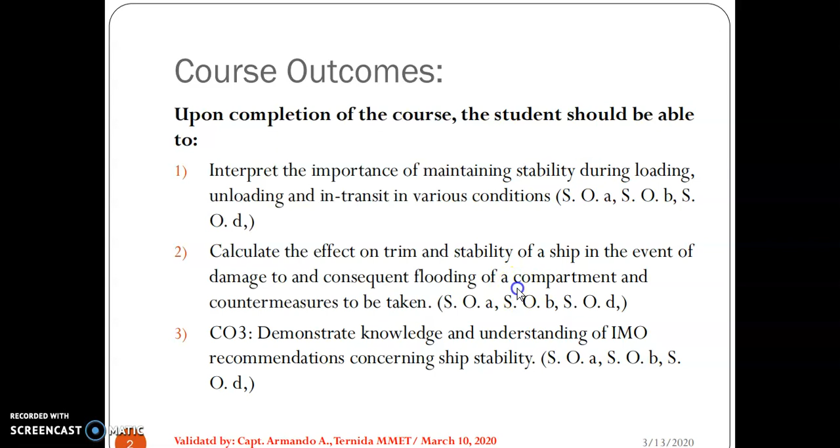Okay, so our topic is materials and strengths of ships. So class, the role of the classification society is the assurance that any practical vessel is structurally fit to undertake a proposed voyage. So each ship is being certified by the classification society, no?

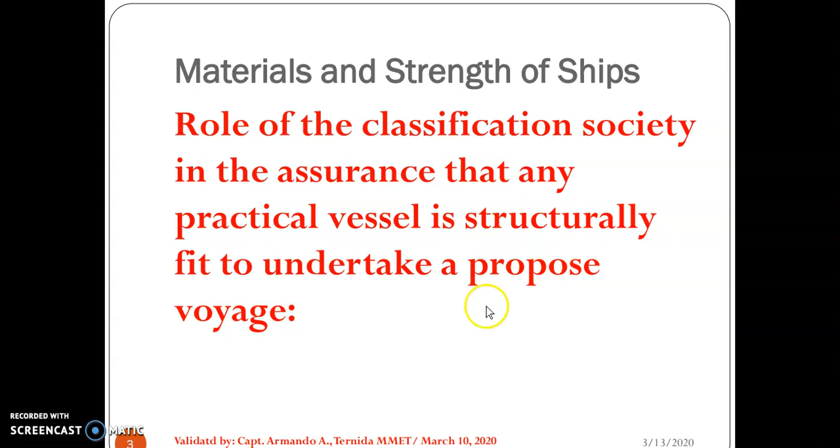Okay, so a system of classification has been formulated over a period of some 200 years. Why? Because the cargo shipper and the underwriter, to insure a maritime risk, require some assurance that any particular vessel is structurally fit to undertake the proposed voyage. Another reason is to enable the shipper and underwriter to distinguish the good risk from the bad. Okay, so these are the reasons why classification was created.

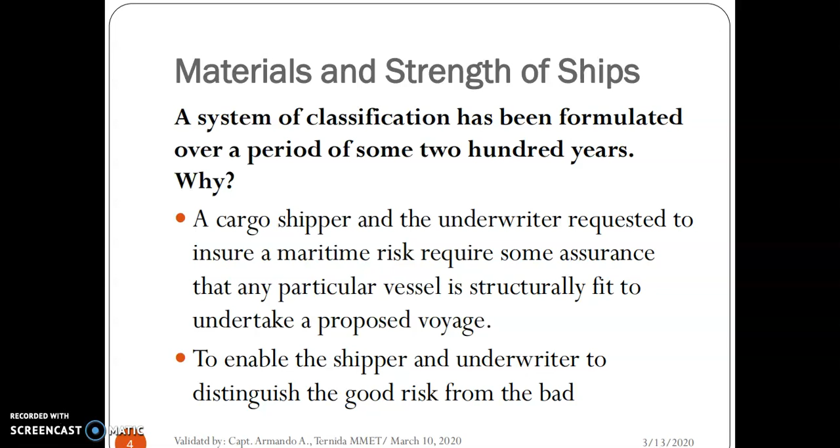Another reason is that reliable organizations have been created for the initial and continuing inspection of ships, so that classification may be assessed and maintained. So the organization has been created to continuously assess if the ship or vessel is still maintained and still seaworthy. Okay, so we are talking about the safety of a certain vessel through the creation of this organization.

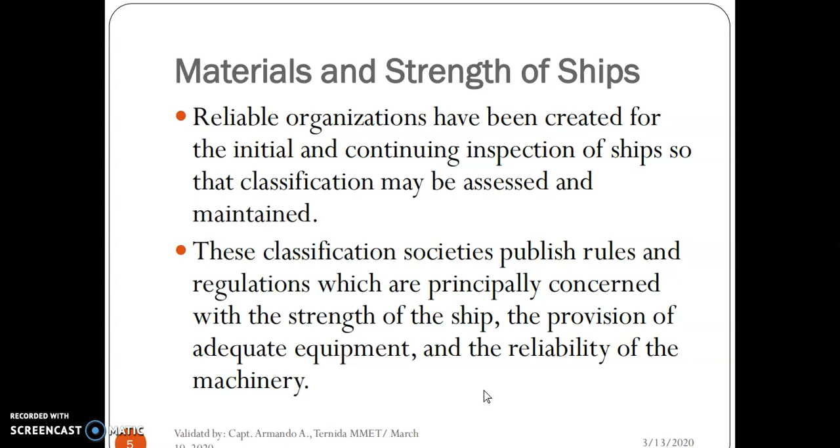Another point is that classification societies publish rules and regulations which are principally concerned with the strength of the ship, the provision of adequate equipment, and the reliability of the machinery. That's why the classification was also published, or created, to monitor all this equipment and classification of a ship.

Okay, so there are principal maritime nations with the following classification societies. First, we have Great Britain's Lloyd's Register of Shipping. So this is UK, no? And another is France, Bureau Veritas. Okay, so these are societies that are very famous with regards to checking or classifying vessels. Another is the German Lloyd, or Germanischer Lloyd. This is also very famous, this German Lloyd or GL, what we call GL.

No? We can see this GL mark in the middle of the vessel, this Plimsoll mark, you can see it was marked by GL. You can see that on certain vessels. Okay, Norway, Italy, United States also have the ABS, or American Bureau of Shipping, as well as the Russian Register of Shipping. And for us in Asia, we also have the Nippon Kaiji Kyokai, or in short, NK.

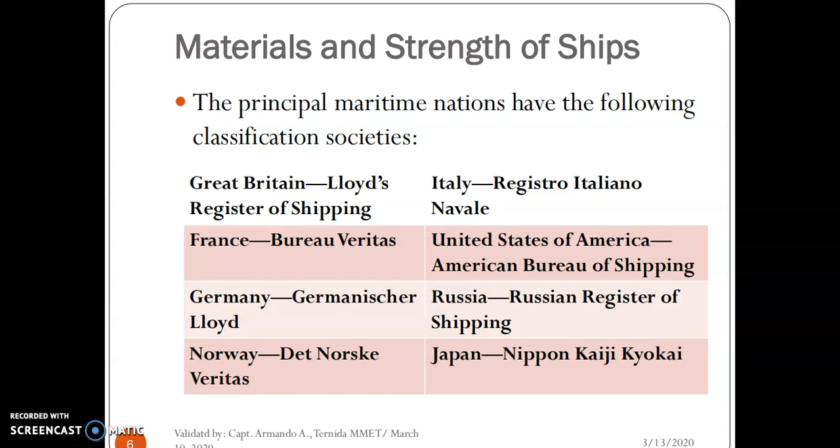Okay, in recent years, the principal classification societies have developed software packages for use by shipyards, which incorporate dynamic-based criteria for the scantlings, structural arrangement, and details of a ship's structure. So this classification society has already developed software in order to carry out their criteria, even dynamic criteria, structural arrangement, and details of ship structure. So it's very accurate what they calculate.

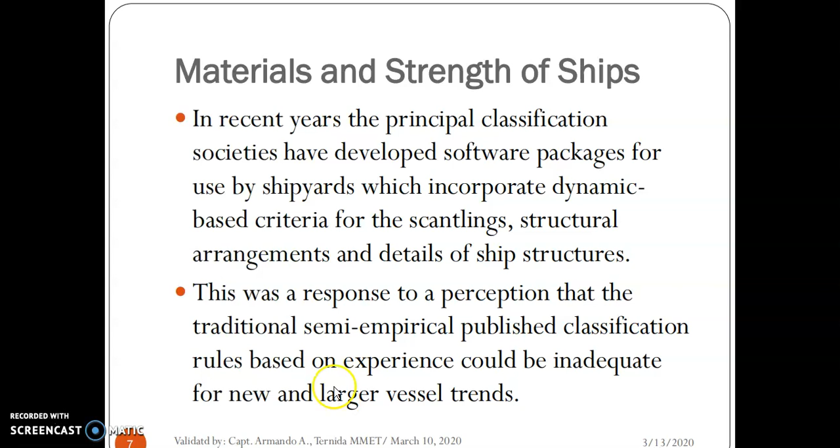This was a response to a perception that the traditional semi-empirical published classification rules, based on experience, could be inadequate for new and larger vessel trends. So for any size of vessel, they can assess if the vessel has been approved by the classification society. So that's the time he can sail, no? He is certified as seaworthy.

Okay, the computer programs made available to shipyards incorporate a realistic representation of the dynamic loads likely to be experienced by the ship, and are used to determine the scantlings and investigate the structural responses of critical areas of the ship's structure.

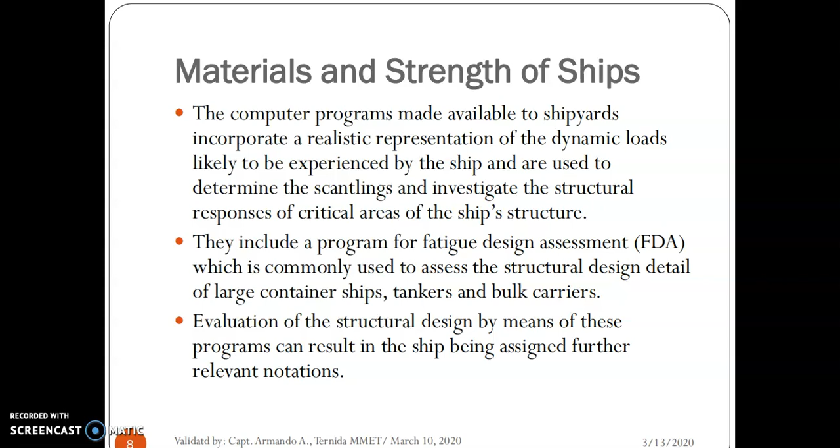Another aspect is they include a program for fatigue design assessment, which is commonly used to assess the structural design detail of larger container ships, tankers, and bulk carriers. This FDA program measures the fatigue encountered by such vessels. Evaluation of the structure designed by means of these programs can result in the ship being assigned further relevant notations.

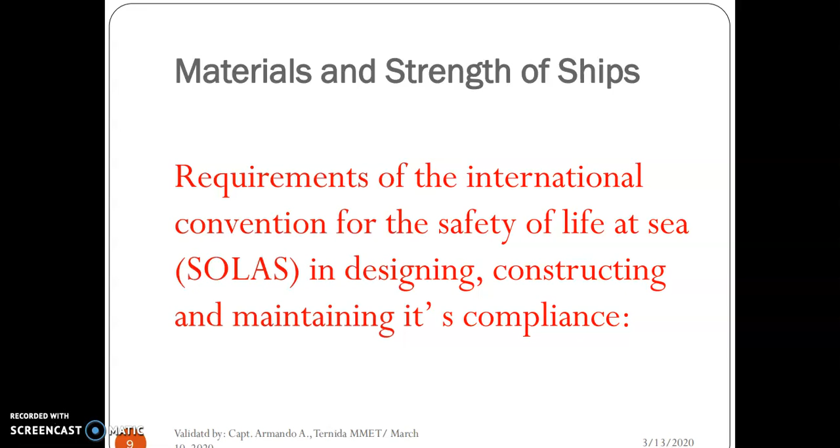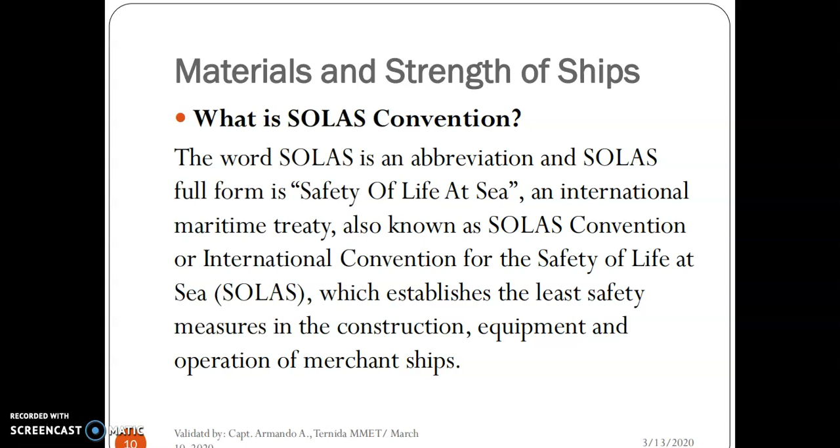Requirements of the International Convention for the Safety of Life at Sea, or SOLAS, govern designing, construction, and maintaining its compliance. Class, what is the SOLAS Convention? The word SOLAS is an abbreviation of Safety of Life at Sea. It is an international maritime treaty, also known as the International Convention for the Safety of Life at Sea, which established least safety measures in the construction, equipment, and operation of merchant ships.

SOLAS Chapter 2-1 covers construction, subdivision, and stability, machinery and electrical installation. This chapter deals with the watertight integrity of the ship, including passenger vessels, and comprises 7 parts explaining the requirements for structural machinery, electrical stability, and other criteria for a safe ship.

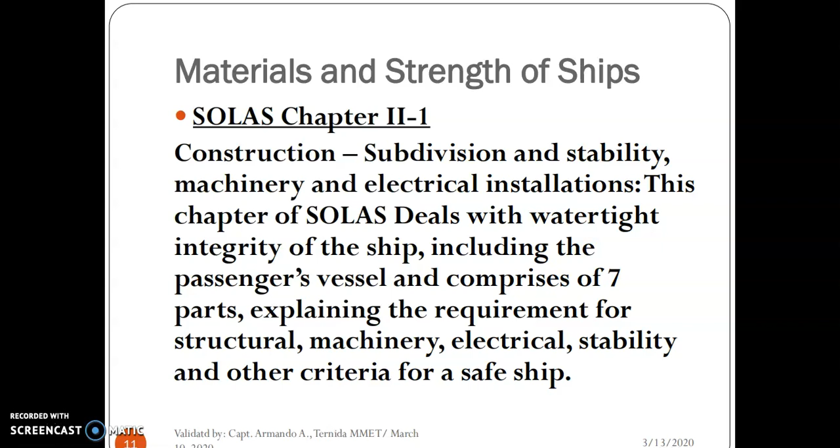Part A contains 3 regulations which explain the application of this chapter on ships as per their keel laying. The regulations also explain the definition of different terminology used in the chapter.

Part A1 comprises regulations explaining the requirements for the structure of a ship, including protective coating, towing arrangement, equipment fittings, construction, and drawings, etc.

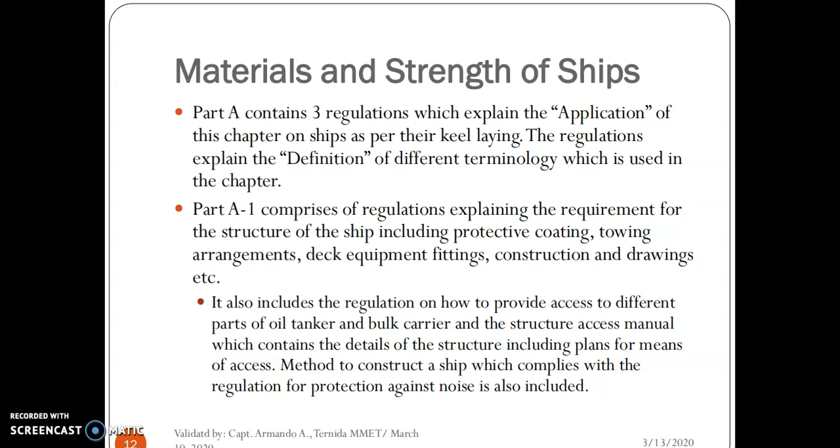It also includes regulations on how to provide access to different parts of the oil tanker and bulk carrier, and the structure access manual which contains details of the structure, including plans for means of access and methods to construct a ship which complies with the regulation. Protection against noise is also included, so even noise protection is included in assessing or classifying the vessel.

Part B regulations explain the stability and watertight integrity requirements. So in Part A, most of it is structural, and here in Part B it's the stability and the watertight integrity.

Under Part B1, regulations 5 to 8 define the necessary conditions for maintaining the intact stability of the cargo ship and the passenger ship. It also includes requirements on the information which needs to be supplied to the master on the stability of the vessel, explaining how to calculate the stability factors in different conditions. So Part B is clearly more about stability.

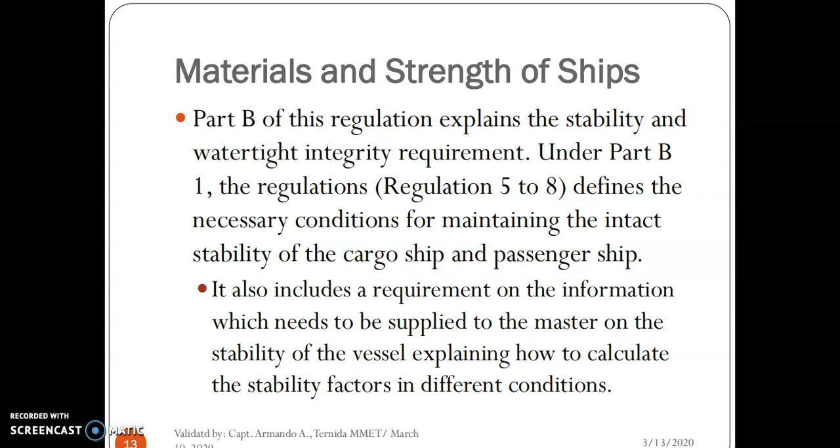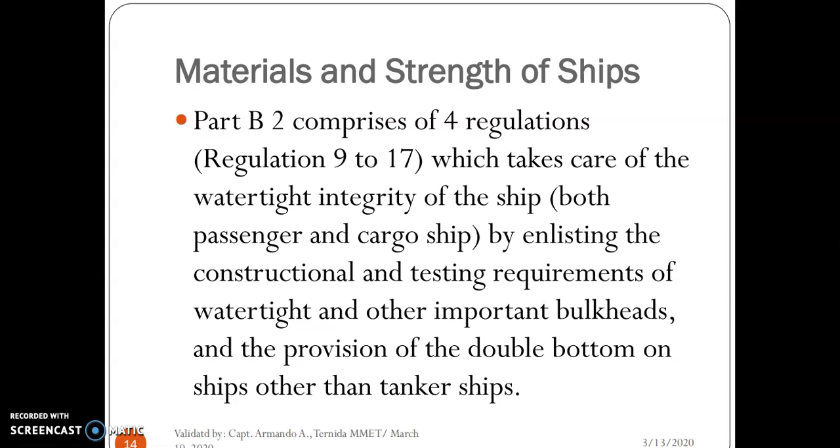Part B2 comprises regulations 9 to 17, which take care of the watertight integrity of the ship, both passenger and cargo ship, by enlisting the constructional and testing requirements of watertight and other important bulkheads, and the provision of double bottom on ships other than tanker ships.

Part B3 explains the requirement for the subdivision and load line assignment for passenger ships. So B3 explains the requirement of subdivision of the load line — tropical, summer, freshwater, and so on.

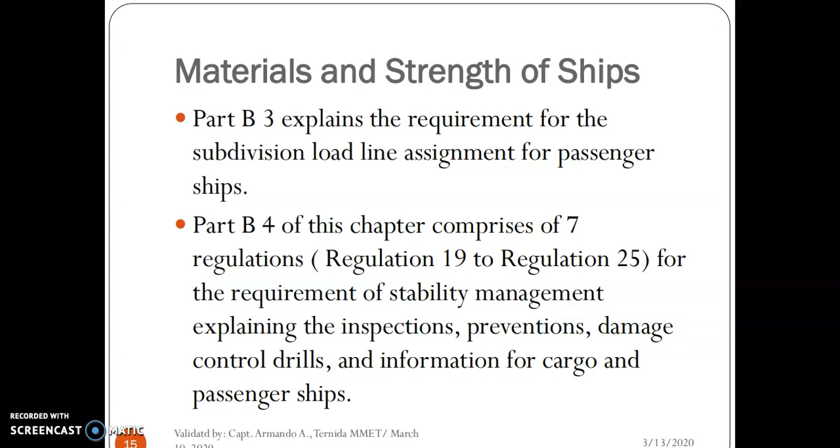Part B4 of this chapter comprises 7 regulations, from Regulation 19 to 25, for the requirement of stability management, explaining inspection, prevention, damage control drills, and information for cargo and passenger ships.

Part C focuses on different machinery installation in the engine room, including the requirement of emergency installation in the passenger ship, covered by Regulation 26 to 39.

Part D of this chapter, from Regulation 40 to 45, focuses on the electrical installation requirements for cargo and passenger ships, including the emergency source and arrangement along with electrical safety and hazards.

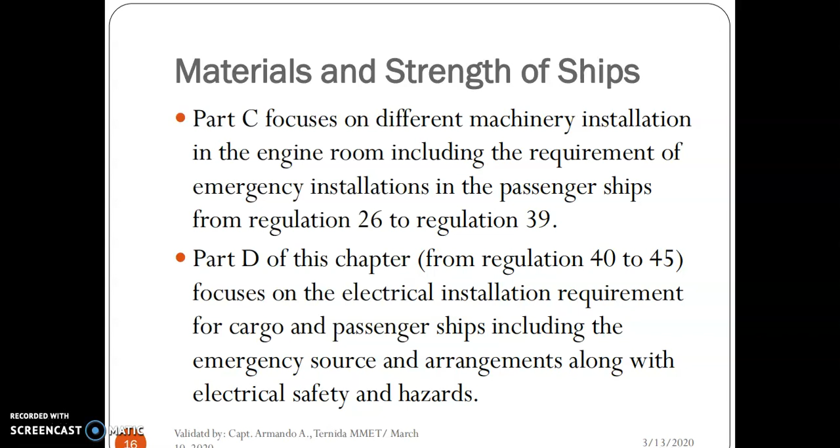We will continue this on our next topic.